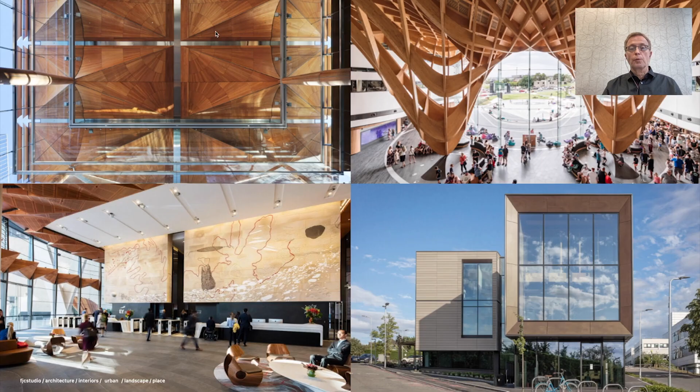You might have heard of FJMT Studio before, and you might have heard that FJMT Studio has been renamed to FJC Studio recently to recognize a change in the leadership of the company. We are a multidisciplinary practice with studios in Sydney and Melbourne in Australia and in Oxford in the UK. We work on a wide range of project types: commercial, educational, cultural, health, residential, you name it.

Our journey started in 2000 when the Sydney studio of Mitchell, Giurgola and Thorp reformed as FJMT. Also in 2000, we started to work with Archicad, and we modeled our projects quite to a detail. And as you can see, we created some nice work with it.

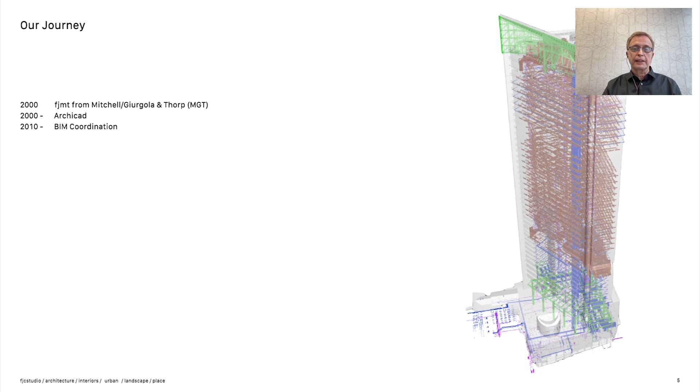From 2010 onwards, we started to use BIM coordination, in particular exchanging IFC files with consultants and contractors. And as you can see, we started with an easy job with a small building, which turned out rather nice. It is actually in Sydney CBD, and won a couple of awards as well.

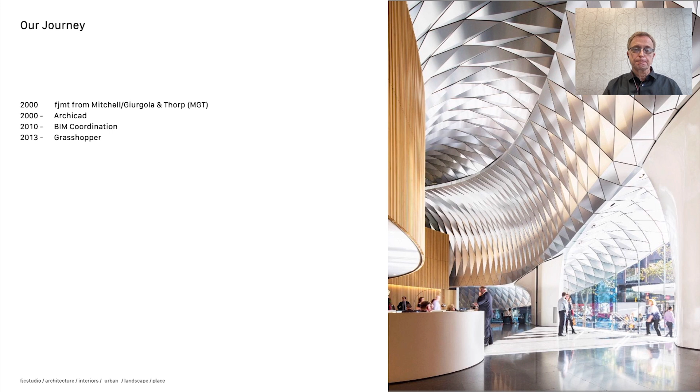From 2013, we started to use Grasshopper to create some generative elements in our buildings. Also in 2013, we won the Building of the Year award at the World Architecture Festival for the Auckland Art Gallery, which looked also nice in Archicad, but even nicer on the photo, as you can see.

As a practice with multiple locations, we were very excited about the full-blown BIMcloud and became probably one of the first adopters of it in 2014. In 2017, we made it to the Archicad 21 box cover with the Charles Perkins Centre building in the Sydney University campus, and it also has won a couple of architecture awards.

Last year, we formed a technology-minded group, the FJMT Lab, which also has been renamed to FJC Lab, and it has got different sections. In the BIM section, it is two of us, my colleague Mateusz and myself, but there are other contributors to it across the studios. People who are Archicad enthusiasts, even Grasshopper experts or BIMcollab champions, or just model managers within Archicad.

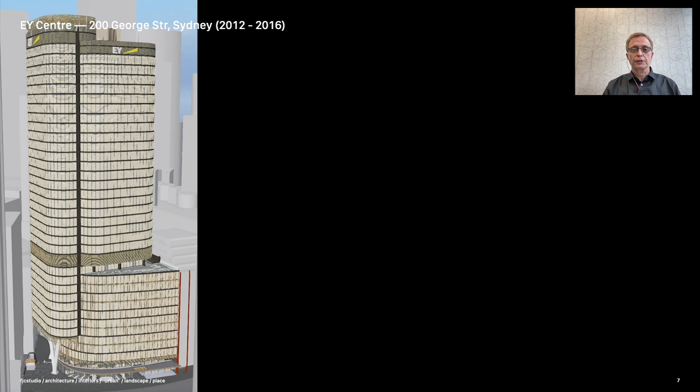Let me show you a couple of our milestone projects with Archicad. The EY Centre in 200 George Street in Sydney was finished in 2016. And this screenshot was captured from BIMx. And as you can see, it is not very different from the actual building.

The actual building has got a quite complicated facade system, which unfortunately hasn't been modeled with the curtain wall tool in Archicad. But there were other interesting features of the building, which were modeled in Archicad with a wide range of tools. Sometimes you have to get quite inventive with how you work with certain tools like the slab tool or wall tool.

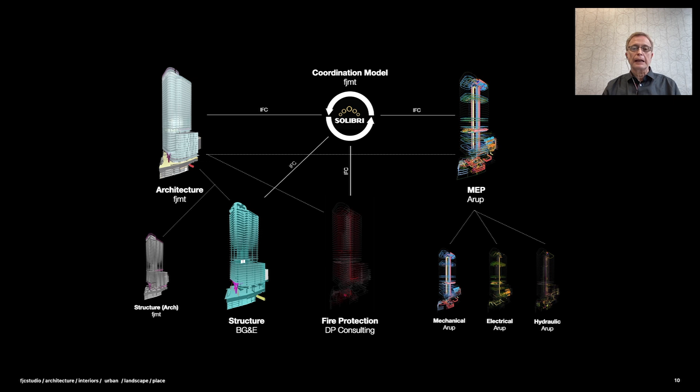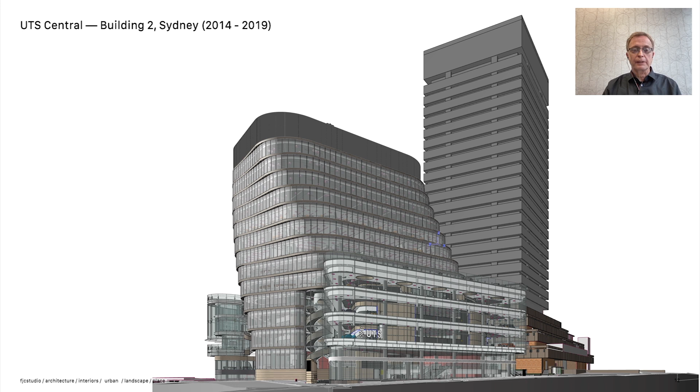In 2014, we have been awarded with the Building 2 of UTS, and we designed almost everything in Archicad in it, apart from that double helix stair, which you see around at the bottom middle of the model. Actually, there are two of them in the building. Unfortunately, back then when we started it, there was no stair tool, so that double helix stair was actually modeled with Grasshopper.

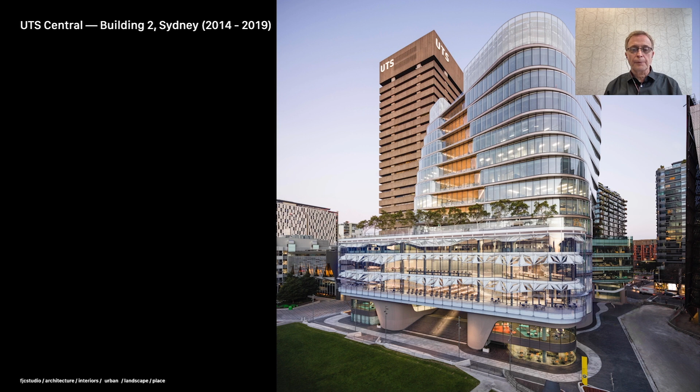On the other side of the building, you can see a strange feature on the facade. This strange feature is a shadow device on the facade of a library, because that library gets quite full sun, especially in the summer. And this shadow device, as you can see, can close when the sun is out and can open when the sun is not out.

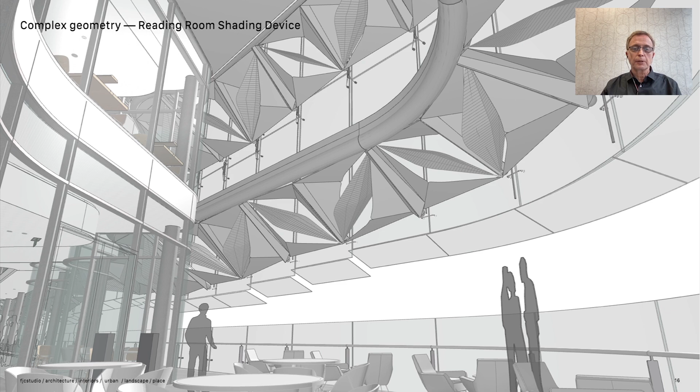The shading device, the shading protection device, was also modeled in Grasshopper, and there is a whole story about it on the Parametric Monkey, if you're interested in it, because the production of the shading device was also quite challenging. What I would like to show you is that it actually made it into the Archicad model, and it made it with all the parameters of it, so we were able to close it as well to see the effect of the shading device within our model.

Obviously, there has been an intensive BIM collaboration during the design and the construction phase, but that is not the reason why I have this image here on this slide. We usually don't import IFC models from services consultants, and not even from the structural engineer, because they make the model quite heavy. So what did we do? Well, we had to import these services consultants models into the building because we had open ceilings, so we had to show these pipes

in the ceilings. What we did was we imported the IFC files into a separate Archicad file, and we hot linked that separate Archicad file into the main model. Obviously, you have to be quite careful with the libraries, because if you're not careful, then the embedded libraries get quite heavy and the model comes to a stall, as we also experienced ourselves.

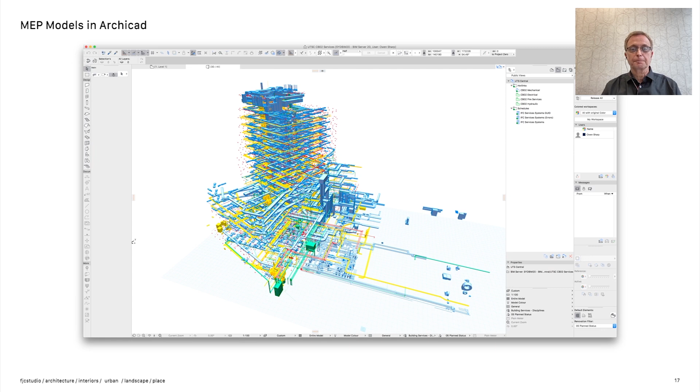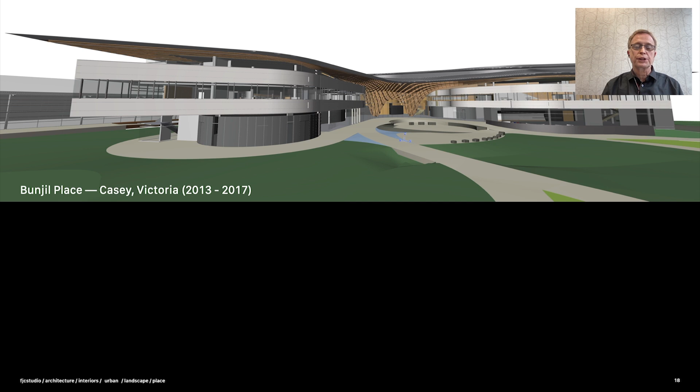It is a very interesting project, what you see on the screen. Bunjil Place in Narre Warren, Victoria, which is about 30 kilometers away from the Melbourne CBD. The reason I included it is because this is the first BIMcloud project we worked on, and it also heavily featured Grasshopper, as you can see on the images. And if you're wondering whether this wooden structure was just a feature or structural, I can assure you it was also structural.

Currently, we are working on, among other projects, a twin tower in Brisbane on the waterfront at Eagle Street. And we are working in joint venture with another architect, and they are working on the podium of this project. And as it happens, quite often they're working with Revit. So, although we are huge advocates of Open BIM, and we're trying to work with Revit consultants exchanging IFC files, unfortunately, sometimes it is not enough.

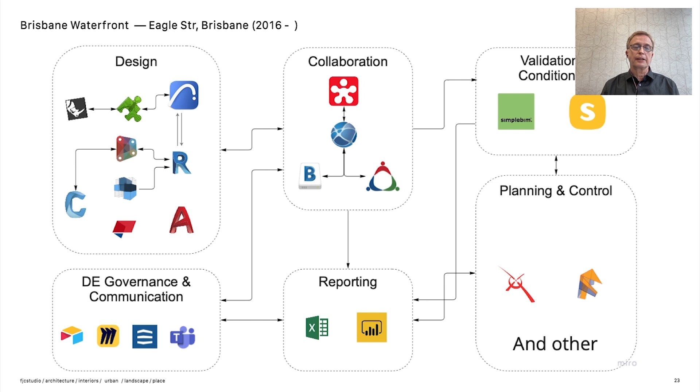So this is the collaboration diagram of the Eagle Street project. It is quite complex, as you can see, and yes, we are exchanging Revit files with the consultants. There was another project, which I cannot talk more about as a project, but the collaboration between Archicad and Revit, or more particularly BIM 360, was quite interesting.

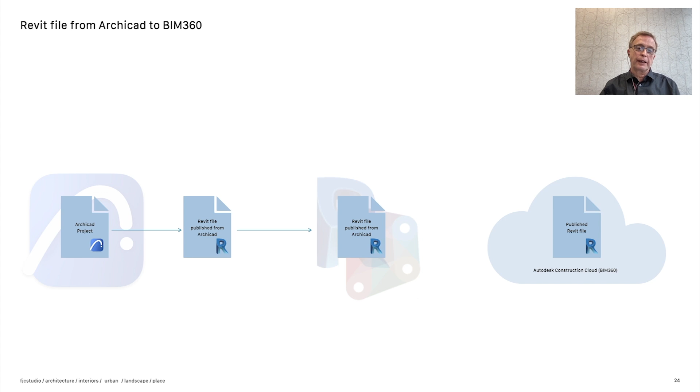Let me tell you a little bit about it, because that also featured a lot of automation in the process. So what was required, we had to give a Revit model, and that Revit model had to sit in BIM 360 or Autodesk Construction Cloud, and it had to be a published Revit file. And when you just save or export a Revit file from Archicad, that doesn't qualify as a published Revit file in the BIM 360 cloud. So we opened that Revit file in Revit, and we found that there are quite a few challenges with it.

Apart from the fact that it wasn't a published Revit file, first of all, before Archicad 26, the exported Revit file didn't include any stories. I mean, all the elements were on one story. And obviously that's not good enough.

There is another challenge or problem, which I didn't include here because we sort of ignored it, that the elements in the exported Revit file are all distinct families. So each element is a different family, a separate family in the exported Revit file, which is a nightmare. But in this project, we could get away without changing that.

A challenge on the other side was that the joint venture partner was required to edit the properties, so the metadata contained in the elements. And as they are exported from the Archicad file, it is simply not possible to edit them in Revit. So that was something we had to overcome.

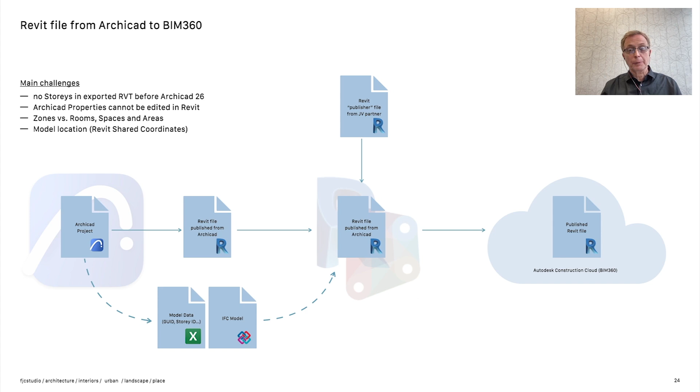But let me talk about automation in Archicad, especially how we solved the circulation spaces with our FJC doors.

So the Australian standard is quite specific about the door types which require access spaces. It's mainly just swinging, surface sliding, and cavity sliding doors, which are also known as pocket doors in Archicad.

And the Australian standard is luckily quite parametric. One of the parameters is the clear opening, which is easy to get from the door object or door library part, and it defines four approach directions - so which way are you approaching the door: from the hinge, the latch side, or is it required to be able to approach the door from both sides, or from the front, which is a usual situation in corridors.

Also, it defines that there are two options in terms of the door leaf and the approach direction. So when you approach the door and the door leaf is opening away from you, like on the diagram on the left on this slide, then it is an away position, and if you are approaching the door and the leaf is opening towards you, that's a towards situation.

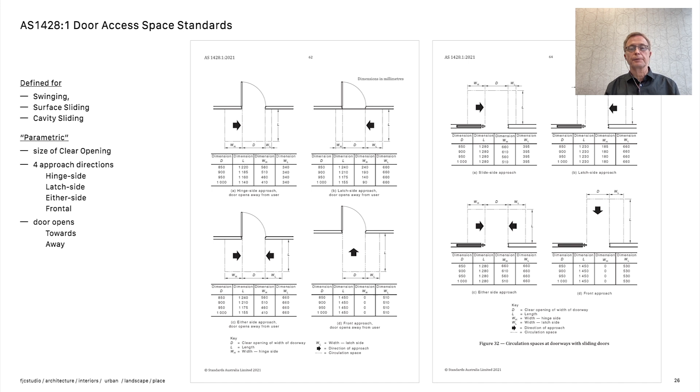So we created a range of FJC doors, and we didn't create all the door types with the swinging doors. Only a handful of them, because we are using only a handful of them in our projects. We almost never use, or actually never use, an arch top door, for instance. So we started with this palette of the swinging doors, and so far there was no requirement to extend the collection.

And we created the surface sliding and the pocket doors, or exterior sliding and pocket doors, as FJC doors as well. Basically, we saved them from the Graphisoft doors. That's why you see the preview icons are so familiar for you. And the Graphisoft headquarters GDL team has helped us a lot.

So a big thank you goes to them. While I'm here, let me also say a big thank you to Phil Green, who was my predecessor at FJC, or back then it was FJMT, who started this whole project basically with one door, which was a fantastic door. But then we decided to go for more doors and try to rely on a much simpler situation using the Graphisoft macros, as you will see in my chart later on.

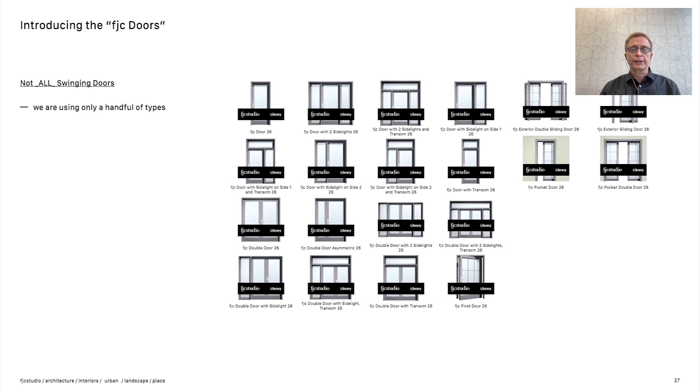So, a quick sort of video about how they work in Archicad. Here is a pivot door, which is an FJC pivot door.

The parameters, when you want to set up the circulation spaces, are hidden in the description panel at the end of the list. We couldn't really manage to put them into, or instead of, the circulation spaces panel in the door settings.

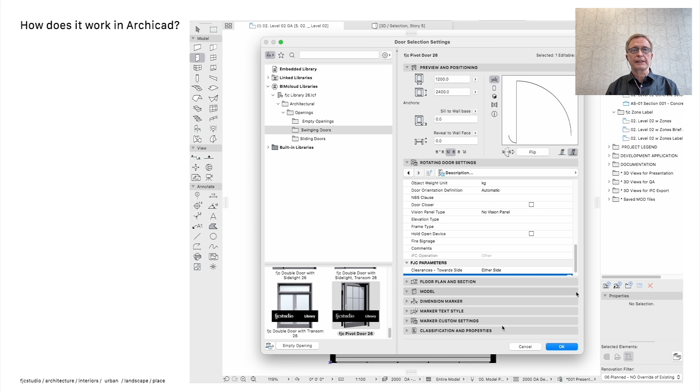Here you just define the approach direction for the door as per the Australian standards, and click OK, and you think that everything is fine. Well, it is actually, but...

The access spaces are visible only when you show them by the model view options. We have got our model view option panel, the FJC library control, as you can see, and the selected model view option combination is showing the settings for AS 1428, which started from 2009, in the form that you can see today.

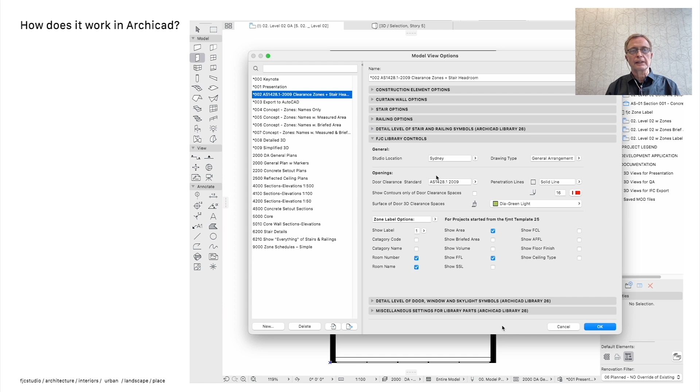And when you turn it on, then you can see that the doors have got the access spaces around them as required. Here there is a door for which I already defined in my little test project the access spaces earlier, and you can see it doesn't comply.

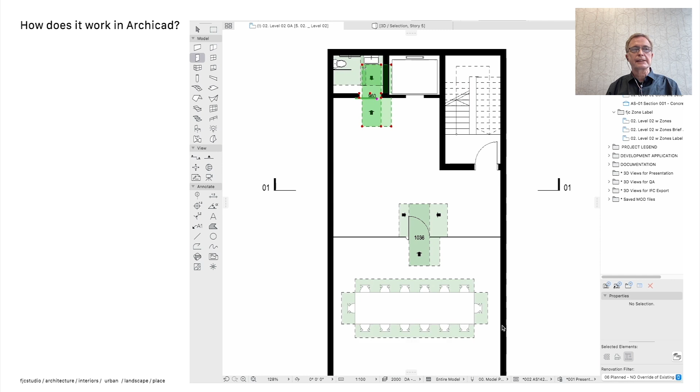So what can you do? Well, you can actually just click the access space hotspot, and you can place the door into a correct position.

So what are the benefits of working with this automated, built-in standard? It's easy to work with because you don't have to look up and enter numbers. You just define the access directions, and that makes less room for errors as well.

The access space is part of the door. That means that it helps us to position correctly according to the 1428 Australian standard.

And while the whole solution revolves around the model view options, that makes it easy to turn the access space visibility on or off.

Like I promised, here's a sneak preview, a view under the hood, of how it is working. So, like I said, there was the Graphisoft door, and the Graphisoft door is a library part which is calling a lot of macros.

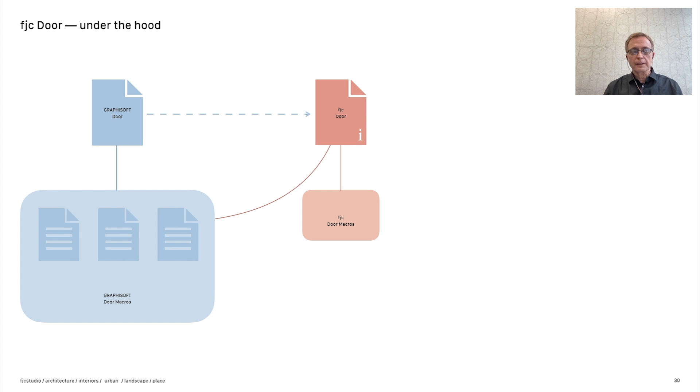And the FJC door is calling on the Graphisoft macros and also some extra macros, which are FJC macros. And obviously it is requesting parameters from the FJC model view options panel.

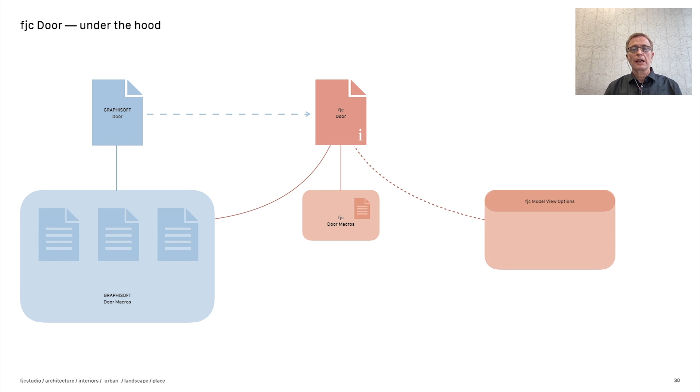Nowadays, the model is more important than the pretty drawings. So we were asked by a contractor if we could provide the access spaces required by the Australian standards as part of the door model as well. And we did, and we created these nice green spaces around the door.

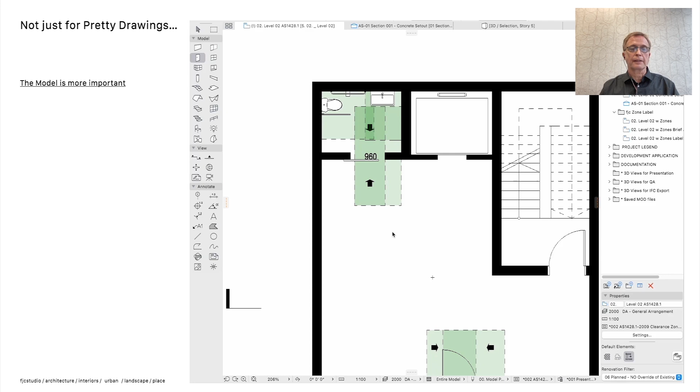And the green surface is defined, obviously, by the FJC library control, so the model view options. And if you don't like this nice transparent green surface, then you can change it to something else.

I would like to note here that the FJC door spaces in the floor plan are using the same graphical settings as the minimal spaces of the other Archicad library parts, because the FJC door reads not just the FJC library controls, the model view option panel, but also the standard Archicad library ones, and we wanted to make it conform with the other spaces in our floor plans.

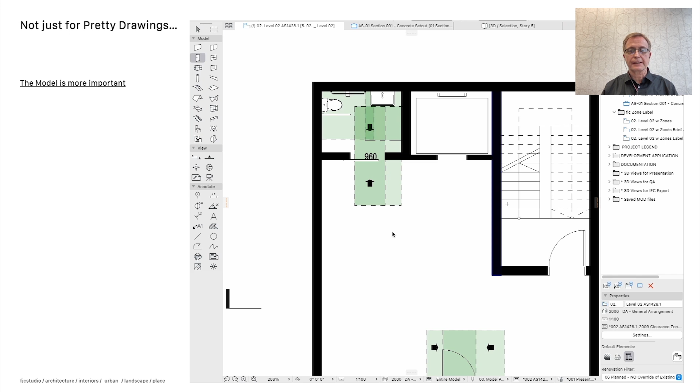What else can the FJC door do for you? Well, it can show something in a structure view.

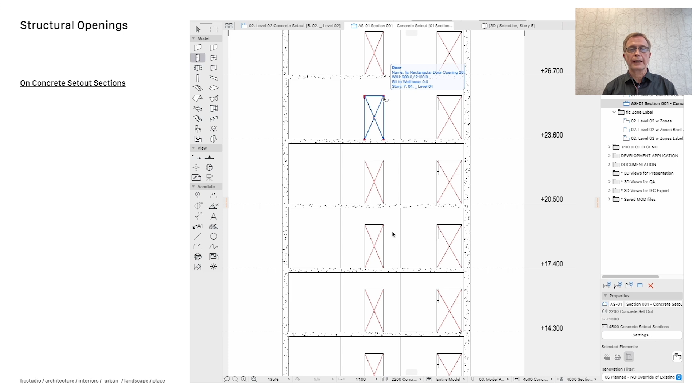You're probably familiar with the term concrete set-out drawings. We also create concrete set-out sections, and you can see the doors convert to an empty door with a cross there. The reason is that they read in that model view option the concrete set-out drawing.

So previously you saw a general arrangement option working there, and the drawing type was now the concrete set-out, which applies more often to the doors than anything else in our design.

It is quite important that the red cross, which is our internal standard for such drawings, is part of the door and not an extra element there. So it makes life much easier for my colleagues.

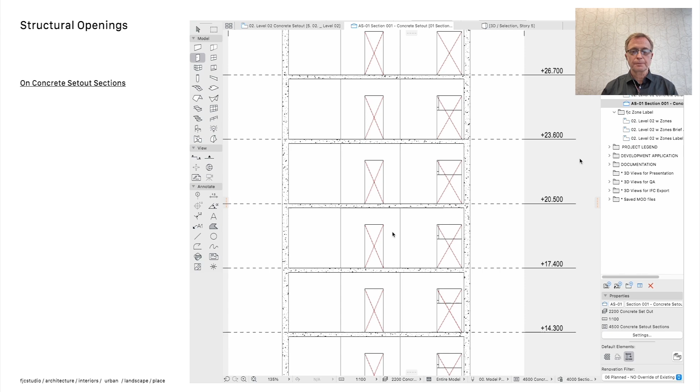Finally, let me tell you about some automations in our zone label, how it is changing its content view by view. Before Archicad 25 with the Archicad library zone stamp, it was quite impossible to show different contents view by view. So my predecessors, Phil Green and Owen Sharp, hello if you are watching this, created an FJMT zone stamp, which we would call FJC zone stamp nowadays, and that was able to show different content view by view, as you can see on the screen now.

We kept this feature in our new zone labels, which we created in Archicad 25. It was rewritten from scratch. Let me show you how it works. In this little model, I've got a couple of zones, and here's a zone and here's a label.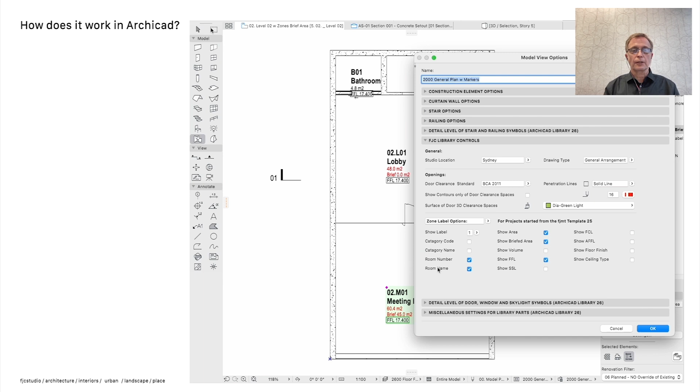If I select this label and change the view, you can be sure that I'm showing you the same label with different content. Where does this different content come from? It comes from the settings within the FJC library controls, the model view options again. If I turn off this panel, you can see that the contents of the label correspond with the ticked boxes in the FJC library controls.

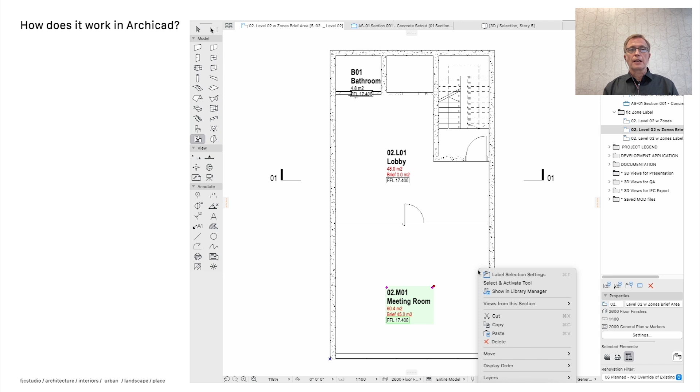Let's turn this panel back, and there you can see that in our template there are quite a few options to show different content for our colleagues, which is required during the design phase. How does the zone get this information from the library controls? There are three settings: auto, on, or off. If the content setting is set to auto, then it gets it from the FJC library control.

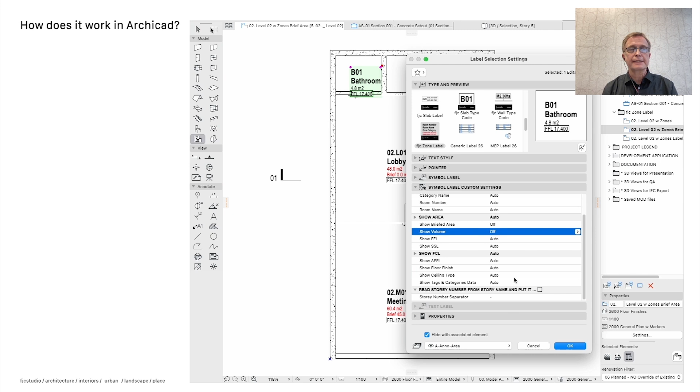Also the story number can be automatically put into the zone label if the zone is shown, if the story is named in a special way. Here you can see that this zone label has some of the parameters turned off, so that's why it is not showing the area and the briefed area in it.

So where is the briefed area coming from? The briefed area comes from the properties section of the zone settings, where we have quite a few properties for zones as well. Why is the briefed area and the measured area showing in red? Because they are quite different in value. As a matter of fact, they both turn red when the difference is more than 5%.

But if I change the size of the zone so that the area is much closer to the briefed area, the briefed area and the measured area are much closer in value, under the 5%, then both of them turn back to black.

Another feature in the zone label is that when the zone label is at an inconvenient place, as you can see at the bottom there, this zone label is hiding parts of the table and the chairs. You can place it in different positions in different views.

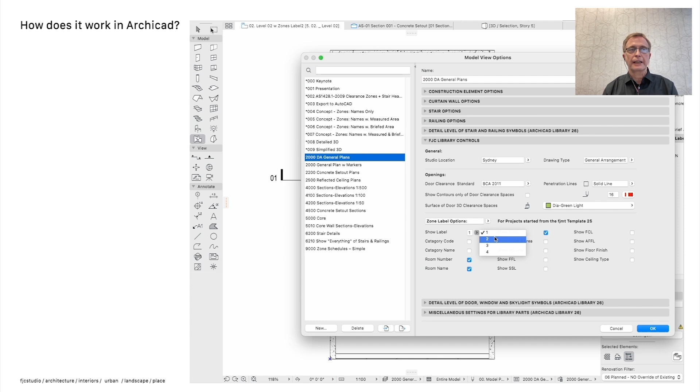So we have basically 4 different labels on sort of layers within the label. At the moment, what you saw was the label on the first layer. But if I change to the second layer, nothing changes because it appears at the same position as the default of the first label.

But if you change the position of the second label, as you can see in this little video, then you can see that when I'm changing back to another model view option, where the model view is showing the first label layer, the label goes back to that first position. So with the help of this, you can actually show the zone label in different positions in different views, depending on the space requirement.

Again, that space requirement, at crowded places, is a real blessing for my colleagues, as they said.